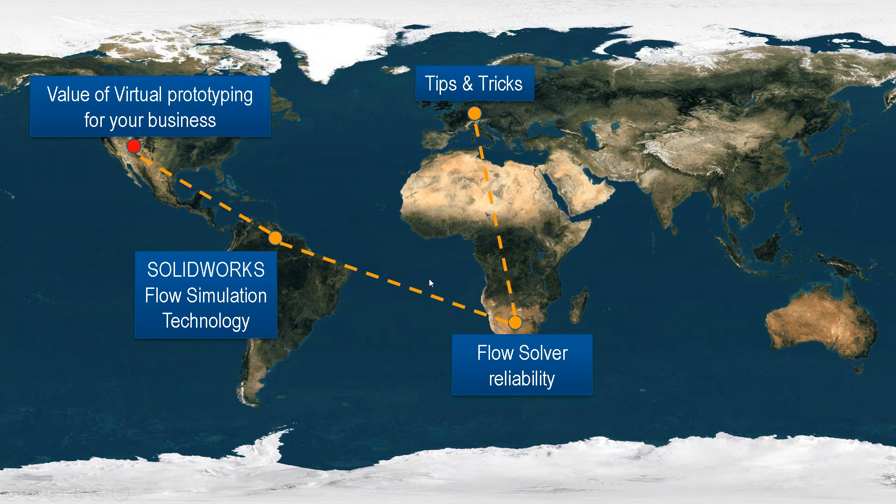So today we'll first give you some insight about the value of virtual prototyping with simulation. Then we will explain the key technologies in SOLIDWORKS Flow Simulation. Alessandro will show you some valuable documentation that proves the flow simulation solver's reliability. Then we will show you some tips and tricks on free surfaces, rotating region, and also how to manage transient results. Finally, I will explain how to submit ideas to guide the development of flow simulation.

Let's start from the value of virtual prototyping. This is the traditional approach, the traditional product development cycle. You start with a concept, then you engineer it, and finally you validate with some prototypes or with some simulations performed by an expert or maybe a consultant.

This approach is okay as long as you don't have issues. If you have an issue, you cannot change the concept, because you don't have time. You are in a phase where the design has to be delivered, so you need to modify what you have, and very often it's very expensive, and you don't have much freedom to edit your design as when you are in the concept phase.

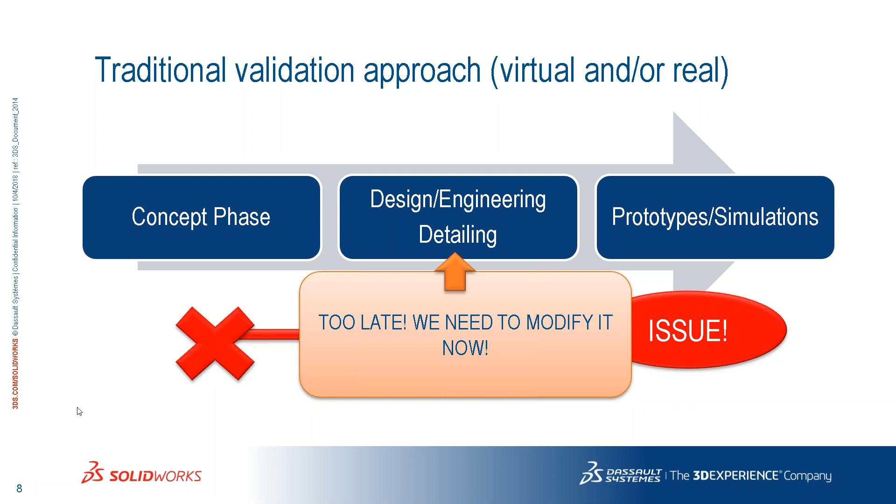So there are some limitations in this approach. It's obviously very problematic to edit an existing engineered design, and it takes time to edit the design. Also, creating prototypes or doing analysis at the end of the cycle is very complex because you're working on a model that has not been conceived for simulation.

Also, there are few resources because you don't find many consultants in the market or experts in finite element analysis. And you don't actually have the time to find an optimal solution, since you're editing something existing when the optimal would be editing the concept. Therefore there's no time to explore alternatives.

It's like going from point A to point B, where point B is your optimal design. You might lose your ideal path to the optimal design, like navigating with a paper chart. If you lose track, it takes a lot of time to get back on track. So not using simulation is like navigating with a paper map.

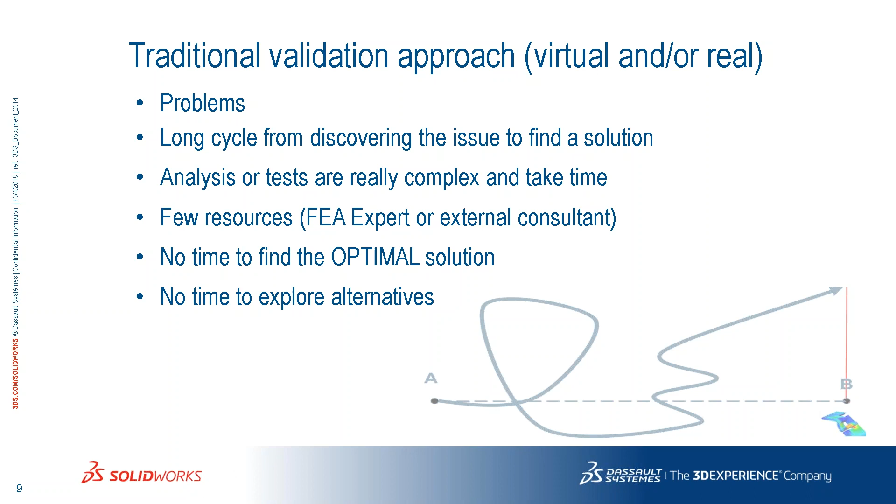This is the product design cycle guided by simulation. It means simulation is performed right after the concept phase, so if you find an issue, you can immediately fix it because you fix your concept. This is very easy because it's a simplified model. Simulations are very quick, and you can quickly validate your ideas. The system even has tools to automate ideas validation, like parametric studies that compare ideas and find the optimal design.

So the value of simulation-driven design is obviously time and cost, because you are compacting the development cycle. You improve quality because you are conceiving an idea that is optimal from the start. You don't have to cycle through many ideas. Also, it's much quicker to edit a concept than an engineered product, so you get your product to market quicker. And this way you are innovating because you have time to validate many ideas.

So it's like you're navigating from point A to point B with a GPS. If you lose track, the GPS will immediately put you back on the right track.

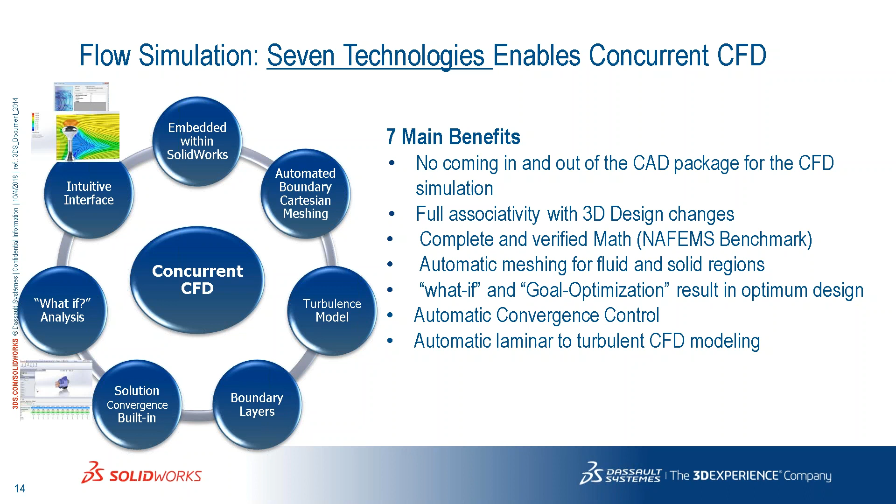There are some very powerful tools that allow you to do what-if studies and automatic optimization based on a design goal. The solver is very easy to manage because there is an automatic convergence control, so the calculation will stop automatically based on very simple criteria. Also, the model to model laminar and turbulent flow switch is automatic and very easy to set up.

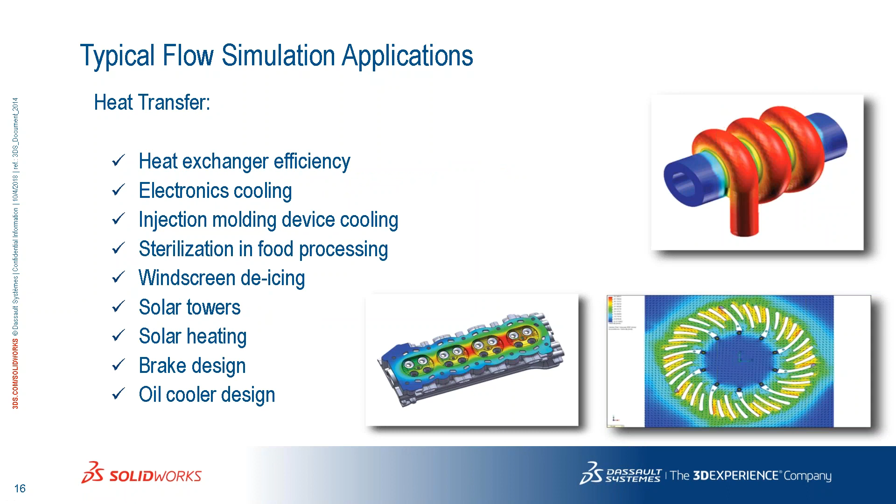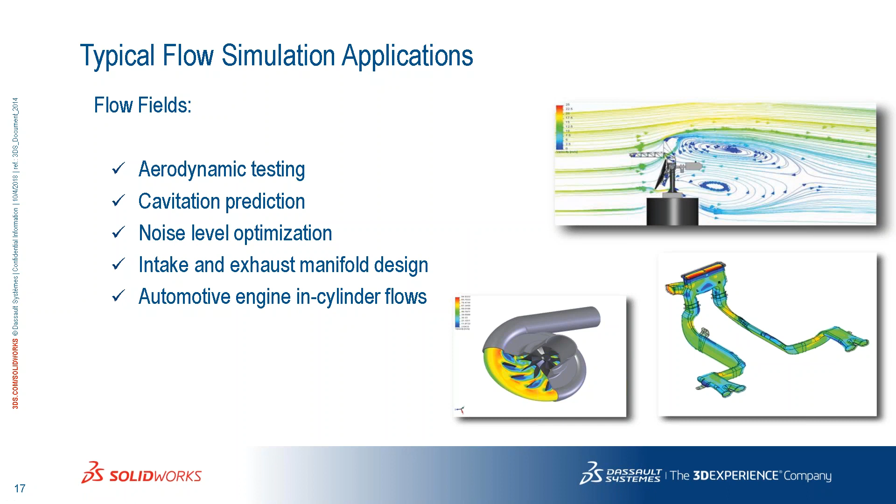Heat transfer is a very popular application, so you can calculate heat exchangers, solar heating, windscreen de-icing, really many applications. Also, you can calculate external flows like aerodynamic testing or even noise level.

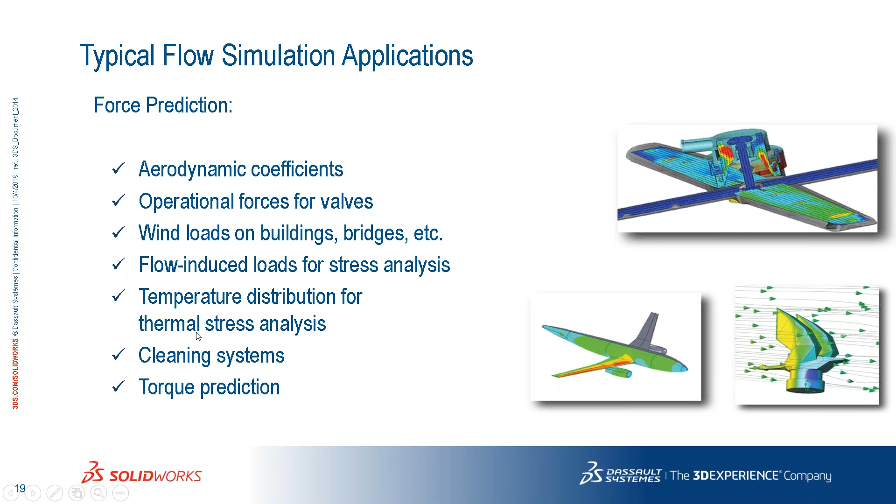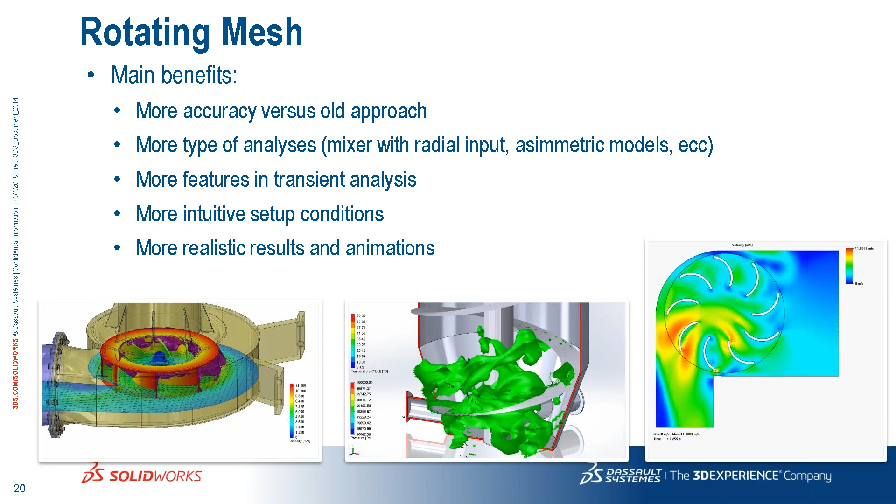Finally, Alessandro will show you shortly the application of the rotating mesh. It's a more accurate approach that will actually make the mesh move and do transient calculations, giving you more precise results. It will allow you to simulate models with non-axis symmetric flows, and also allow you to create a very realistic animation because you see the object moving at different time steps.

So the next step will be flow solver reliability. I will pass the screen to Alessandro.

Okay. Alessandro, can you see my screen?

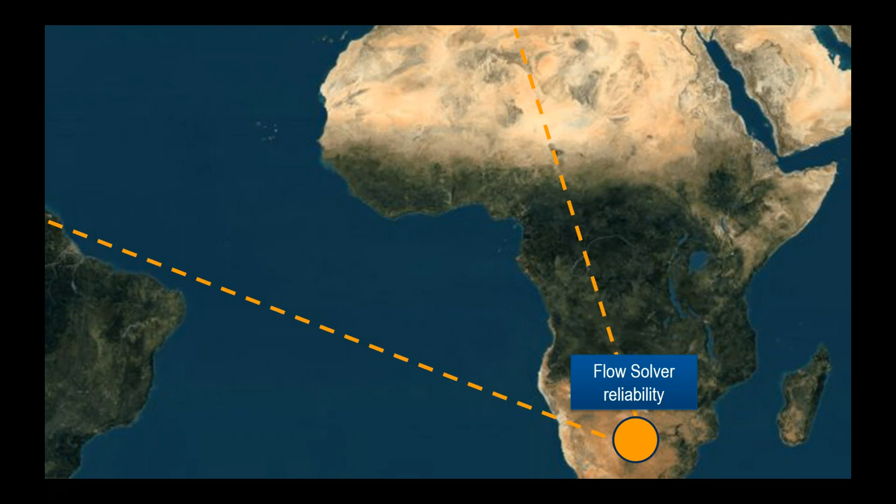Yes, okay perfect. So let's talk about the reliability in flow simulation. Basically, the concept is industry proven. I would like to share this with you because sometimes it's a little bit hidden in the installation. If you have flow simulation, you already have a lot of documents to prove that the real test data is really similar to what is calculated from flow simulation.

This is the path in your PC to find the documents. There are more than 28 examples with 2D and 3D models, so the models are available, along with comparison to the experimental data. Some examples include convergent divergent channel, heat sink convection, natural convection, porous media flow, impeller—of course we will see something about rotating region, cavitation, thermoelectric cooling, and so on. Many examples—I'd like to now show you the PDFs.

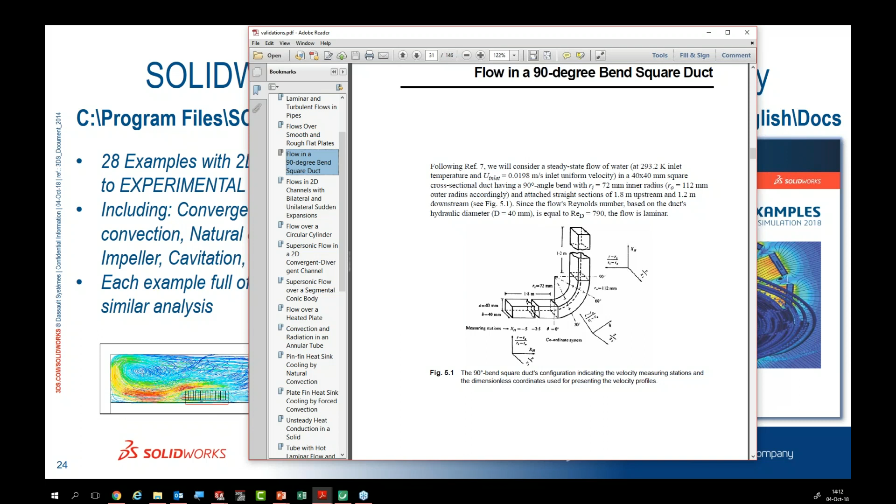So, for example, this is the validation example I am talking about. It's in your installation folder right now. Here you can see a 90-degree bend square duct with all the test data and all the flow simulation data for comparison, or you can see other examples as well, also in 2D.

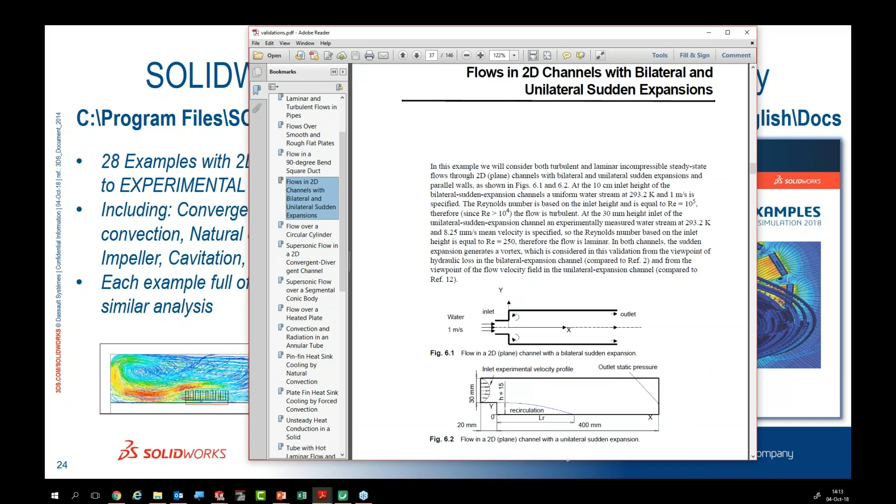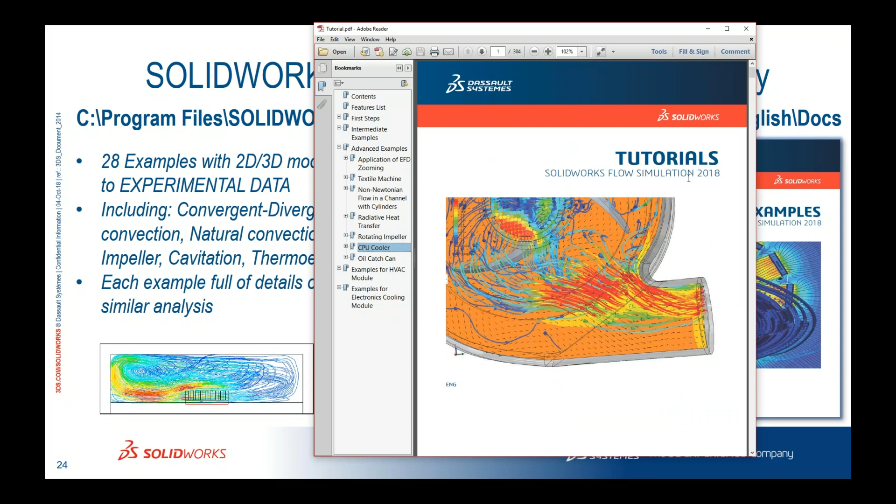So it's a very good start to understand not only that the solver is reliable, but also how to start with a specific case. Also present is the tutorial section, the tutorial document in flow simulation. For example, you can start with the first examples, very basic, some advanced examples like the CPU cooler that I will use also for presenting some tips and tricks. It's very useful because you have all the information on how to set up this particular analysis.

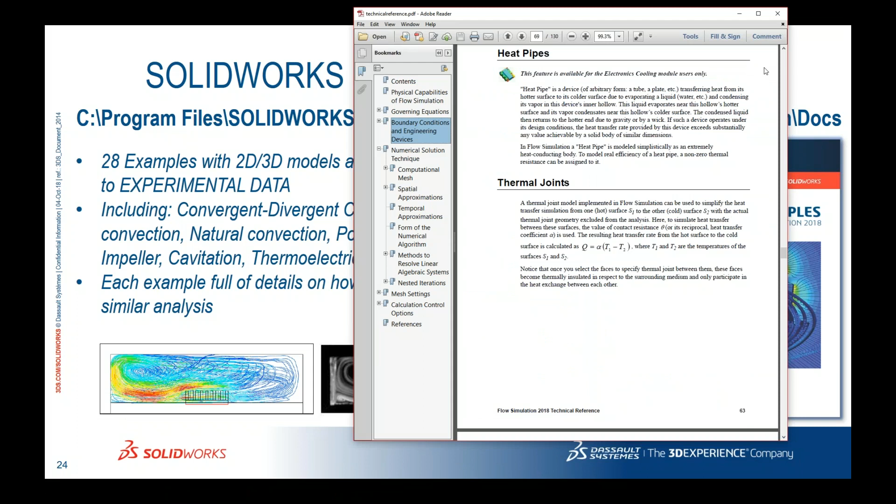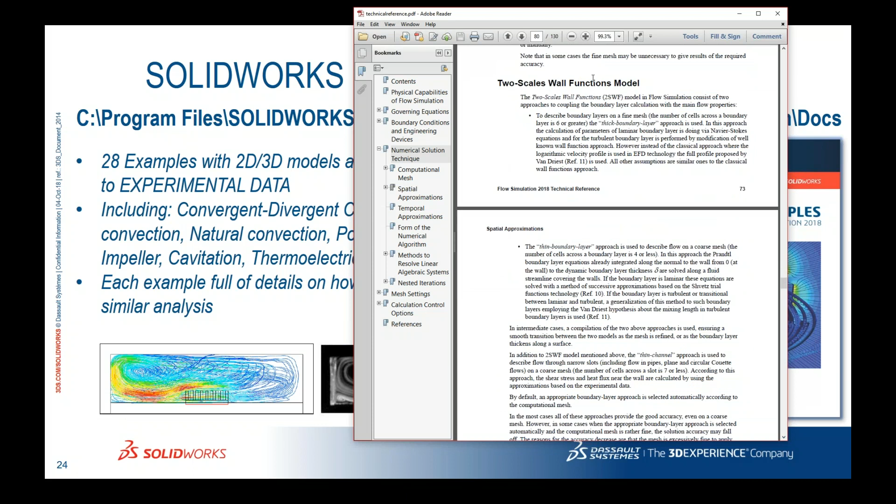Also, the last document I will show you is the technical reference. Apart from the nice image of the Star Trek Enterprise, this document is about the numerical approach—how the mesh is performed, how all the functions and approximations and equations are used, and so on. So if you really want to dig into this specific approach, this is the document.

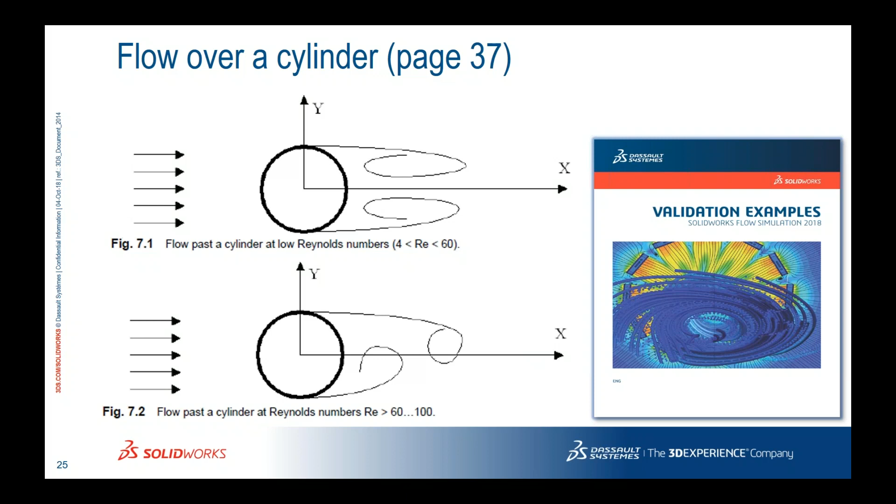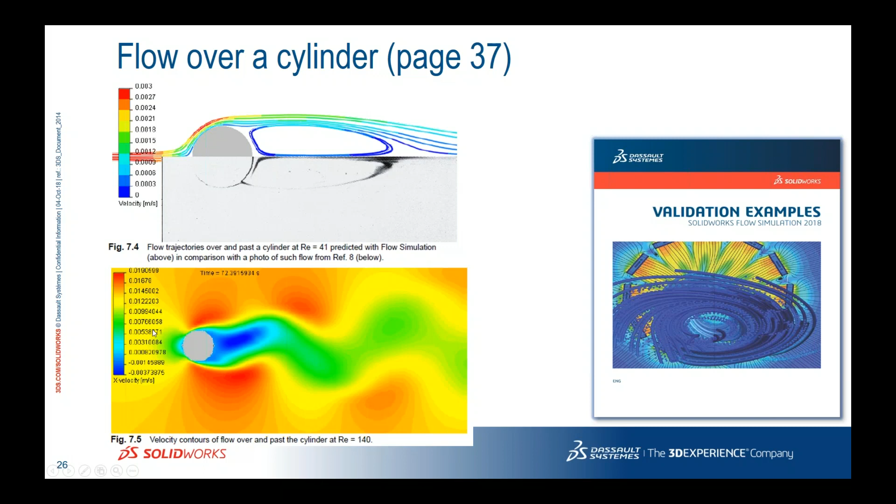Let's talk about an example. Here I have selected flow over a cylinder. You can see the flow with low Reynolds number and high Reynolds number, so laminar and turbulent. This is from the example—you can see the real results and the flow simulation results. Alessandro will show you an animation of the von Karman street in a few minutes. Also here you can see a comparison of flow simulation data with real tests—very useful tools to understand that the flow simulation solver is very reliable.

Okay, let's go to the main section about tips and tricks. We will show you a lot of things—sorry, we will rush a little bit, but the webinar is being recorded, so you can review the recording as much as you want.

So don't worry. Rotating region is very important—it's from around 2015, but I think it's worth understanding better how to use it. Also, free surface is new from last year, 2017, and maybe some customers have skipped this and don't know it exists, and it's very important. I'd like to share some examples, some tips and tricks. Optimization—Alessandro will talk about optimization strategies and other information, and something about post-processing, including animation of results, which is very important when presenting to your manager or customers.

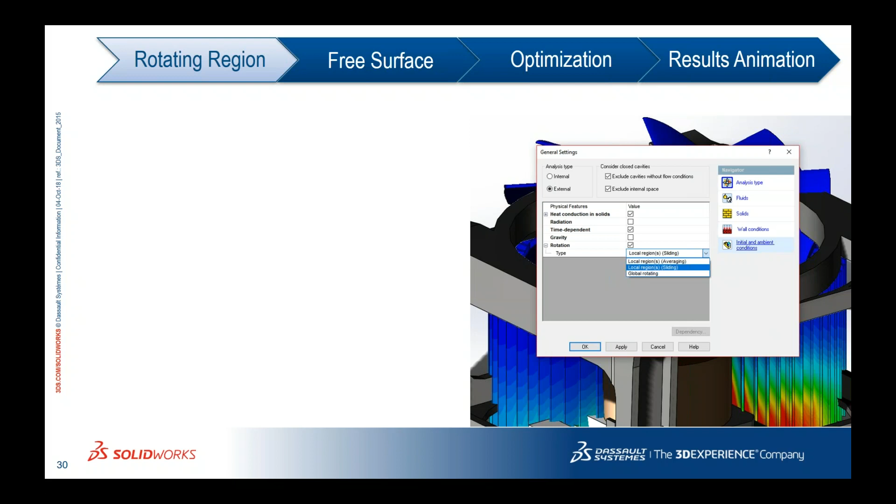When to use it: the sliding/rotating mesh technology is meant to analyze the real geometry of a rotating device. So if you want to design and analyze your geometry, it's better to use a sliding rotating region. You're also interested in the time progression of results. Of course you're interested in the steady state behavior too, but in this case it's important to understand how it progresses to steady state—you're analyzing the time frame.

When not to use sliding, and instead use averaging: when you just want to analyze the overall behavior and aren't interested in each time step before steady state—you just want to see the steady state. Or, for example, you're dealing with purchased components like fans, impellers, turbines, and so on, so you don't deal with the real geometry—you just want to understand the effect on the rest of the domain, and you're only interested in results at operating speed, at steady state.

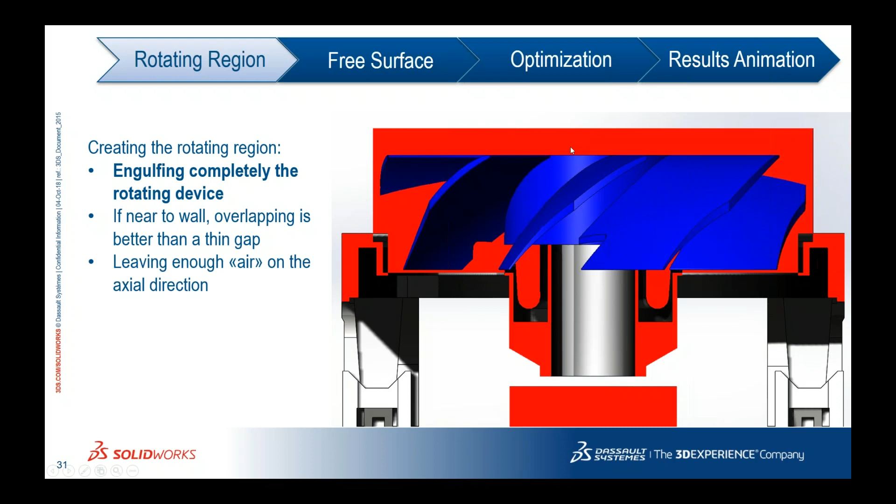Also, another suggestion is to leave enough room in the axial direction to give the solver enough information for the intake.

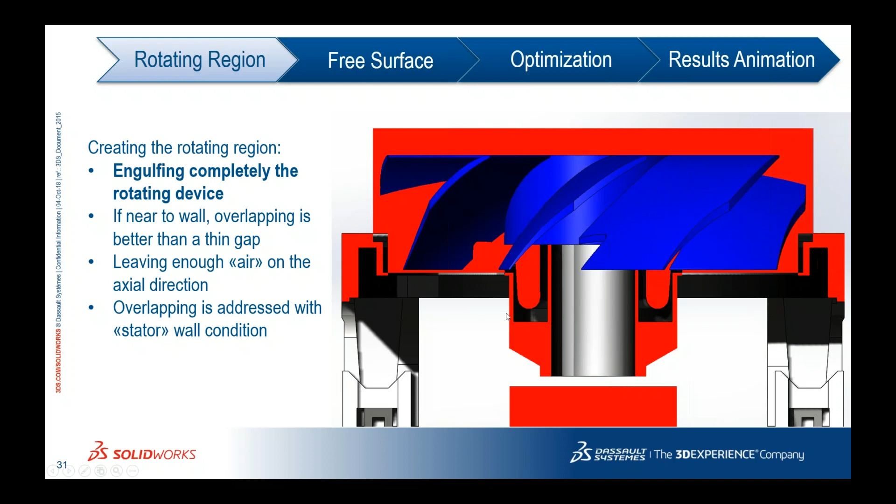If you're creating a rotating region like this, overlapping some components, you have to apply a boundary condition to the overlapping regions. You can select entirely the fixed components and add a boundary condition called real wall, then you have to activate the stator condition. This is much more preferable than leaving a small gap along that line—it's better to overlap the region.

Let's talk about the time step. Why time step? Because if you are using a rotating mesh, this implies automatically the time-dependent analysis. So you want to set up a time step, or let's say you have to use a time step, but you can set it up in a better way.

The first way is to leave it automatically, but don't get me wrong, the software is doing a good thing, but sometimes it's too much. Let's say it's calculating a lot of data. So the risk is to wait a lot of time just to have maybe a rough analysis.

So the suggestion here is to use a manual time step for better control. Better control, I don't mean precision. With the automatic time step, you have precision, but maybe you are wasting a lot of time. With the manual time step, you have a better control and a compromise between precision and time spent on the simulation.

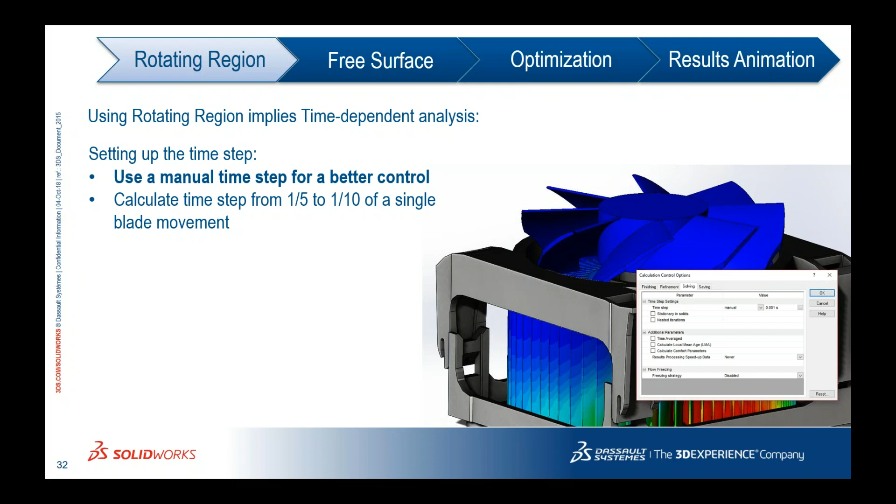I have here a rotating device with 500 RPMs, so it means 0.12 seconds per revolution. And I have 8 blades on this fan. So the time step here is 1/8 of 0.12 seconds per revolution times 1/10. This means 0.0015 seconds, or even less if you want in this case.

If you are in a situation that you want to spend less time, you need just a rough analysis, you can lengthen the time step, let's say up to 1/5 or even 1/3 if you want.

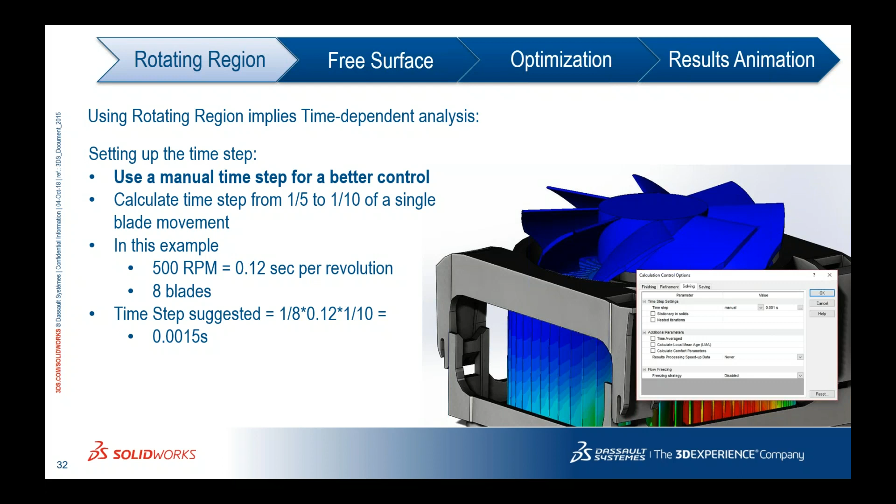Also, it's very important to remove travels and goals convergence and activate the physical time. What I mean, in the calculation control options here in Flow Simulation, you have to go to calculation control options. And here I have already shown you the time step has to be set to manual and input the time step. And in the first page, normally you will see like this.

It is not suggested with the time-dependent analysis, because basically travels means that the calculation is stopped when the results are traveling 4 times the domain. And that is not what you want. I will explain in a bit.

Also, goals convergence is not what you want to stop the analysis, because in this case, basically you want to stop the analysis only when you are at the end of the time frame that you have thought. So basically here, 1 second. So this is the suggestion for this kind of analysis.

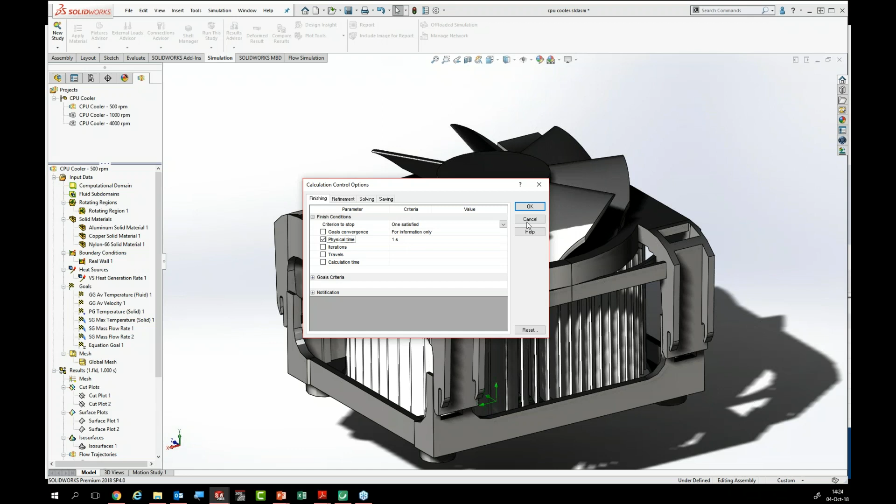Let's talk now about free surface. Free surface is new from 2018. Maybe many customers haven't used it, so I would like to give you a good idea to approach this feature that is very, very interesting.

This is the overview of the physical model. Basically, it's based on volume of fluid approach, and the main focus here is on robustness and performance. There are some limitations, of course, so it's better to know. For example, the two fluids have to be immiscible. We cannot mix together two fluids.

So we have here an example of pouring tea into a cup. Basically, we are talking about a liquid and a gas, or two liquids, for example. The density difference cannot be much more than 10 to the power of 4.

Mach number is limited. Of course, it's always transient because we are developing the flow, so we are interested in the transient analysis. And there are some limitations on the surface tension - we cannot take into account surface tension. We cannot use the rotating mesh with free surface. And we cannot have phase transition.

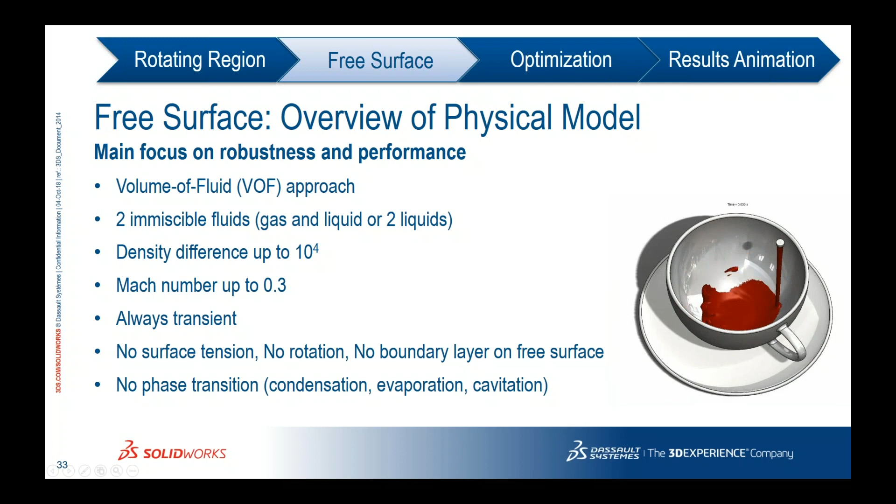Some interesting examples that we can analyze with free surface: we are talking about tank filling - very, very nice approach. We can input and understand how much time is needed to fill a tank. Also, the sloshing in a tank.

So we can apply forces, we can apply movement and inertia, and we can understand how much the water is sloshing, for example, in this case, and how much force it is producing on the tank. Also, we can approach fountains, so we can see what is the height of the fountain, we can see the spreading of the water, and so on.

Also, another nice application is about wave making resistance. So in a boat, in a ship, we can see the wave process, the wave, and also the resistance to that.

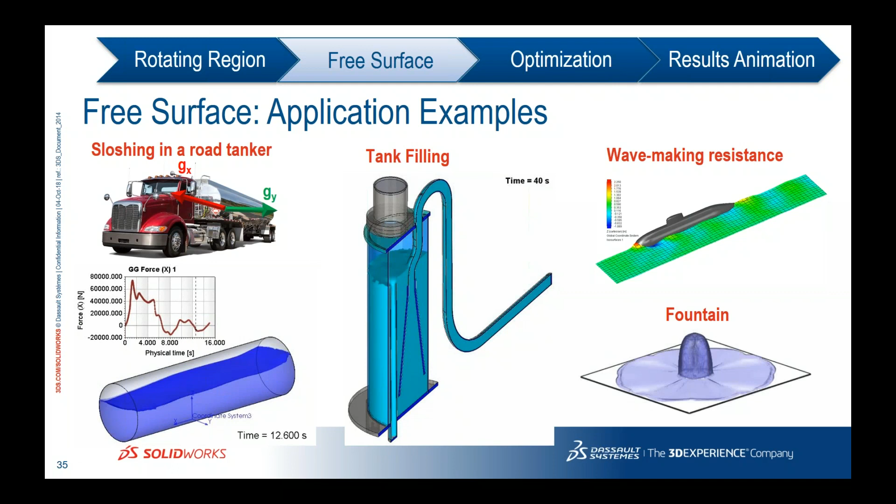How to use it? First of all, to use free surface, you have to activate the analysis type in the first window. This is automatically forcing the time dependent analysis, and automatically it makes unavailable some other choices like rotation, humidity, and so on.

Also, you can set up initial conditions. To do that, the best is to use the dependency type of H. This is available only if you use gravity. So in this case, you can set up, for example, a level of water, which is very nice because this is maybe the starting point of the simulation.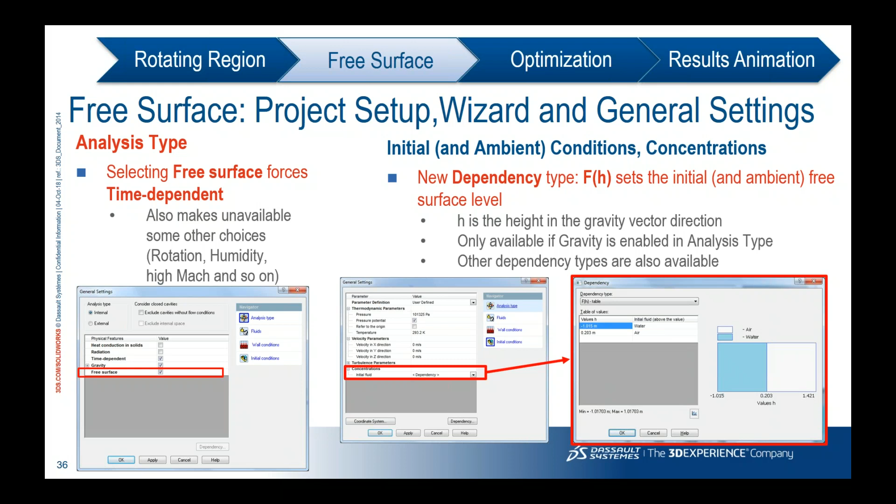Also, the same thing can be done inside the fluid subdomain. So if you want to use the free surface feature only in a portion of the domain, you can use the fluid subdomain here. You can define just a face of the subdomain. You have to input an immiscible mixture, so then you can add fluids like air and water together. And in substance concentration, you can again use the F of H table to define the initial level of the water and the air.

Also, a very nice feature is the ability to create a solid as an initial condition for the liquid. In the example on the left, you can model this solid, and then define initial condition and boundary condition. You can select the solid, you have to disable it, it's normal, and you can assign it as water, for example. Then the simulation will start with this as an initial condition, the initial level of the water in that case. Very powerful feature.

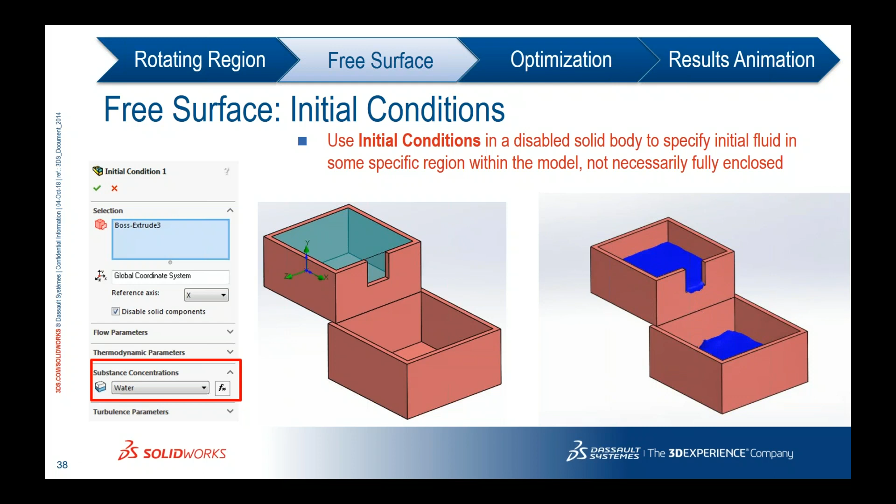Also, as I mentioned, we can analyze ship and vessel wave resistance and wake generation. Here are some tips and tricks. It's better to add the solid if the bottom is present, and not too much, because it has an effect on the wake generation. You have to make the domain sufficiently large. For example, with a submarine, you have to count the width from 5 to 10 times on the sides, and also up and down. And upstream and downstream you need at least one length of the object.

Also, the model is capable of simulating waves. You can input this, but at the moment there is no user interface, so you have to input the equation of a wave, and this can be used as an initial condition of rough water, for example.

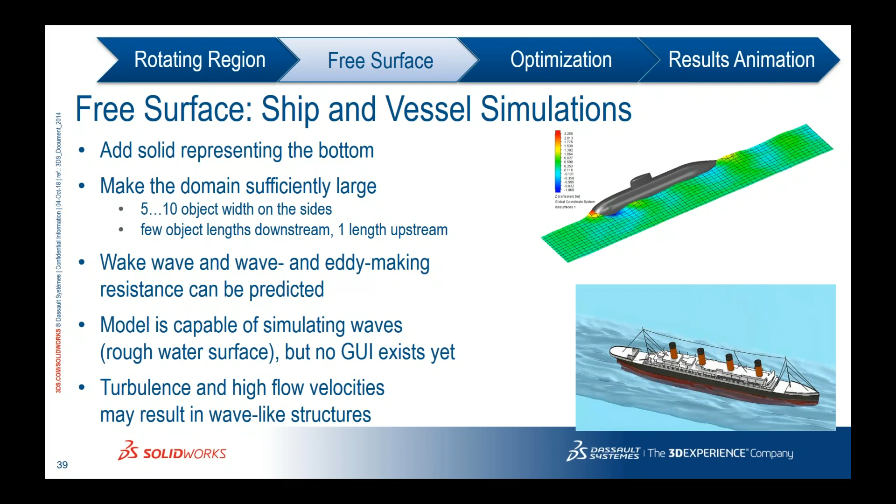Also, in the meshing of the free surface, you can use the solution adaptive refinement, the mesh adaptive. In this case, the mesh is recalculated each iteration in terms of the results that we want to see, so it will follow the flux, the stream of water that is pouring into the other recipient. It's completely automatic, but of course it's time consuming. So some tips: don't use it for chaotic flows, use it only for very well defined flows like here. Also, avoid using more than 1 or 2 levels of mesh refinement.

Okay, let's talk about results. Here is a very nice animation of a sloshing tank. In this case, the approach is based on the volume fraction. I will show you inside Flow Simulation.

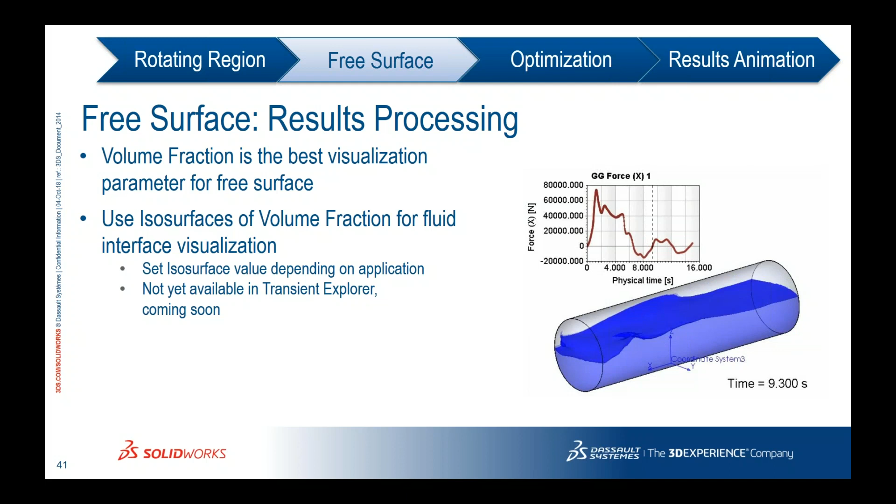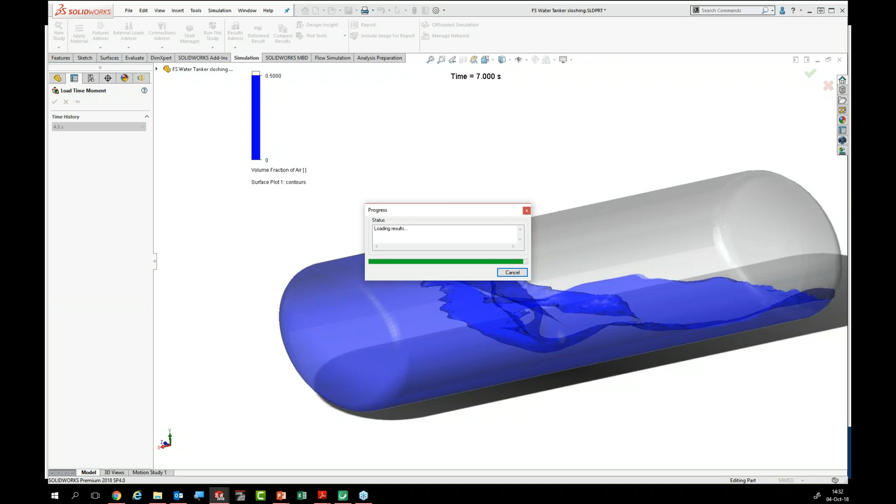So let me start from here. Let's check another time moment, for example. Okay, so you can see from this plot, it's like having the fluid that is sloshing into the tank. How is it done? Basically, I will start from scratch.

So you have the model. It's transparent, so it's just SOLIDWORKS. You have to select it as transparent. Then you have to create a surface plot of the inside surfaces.

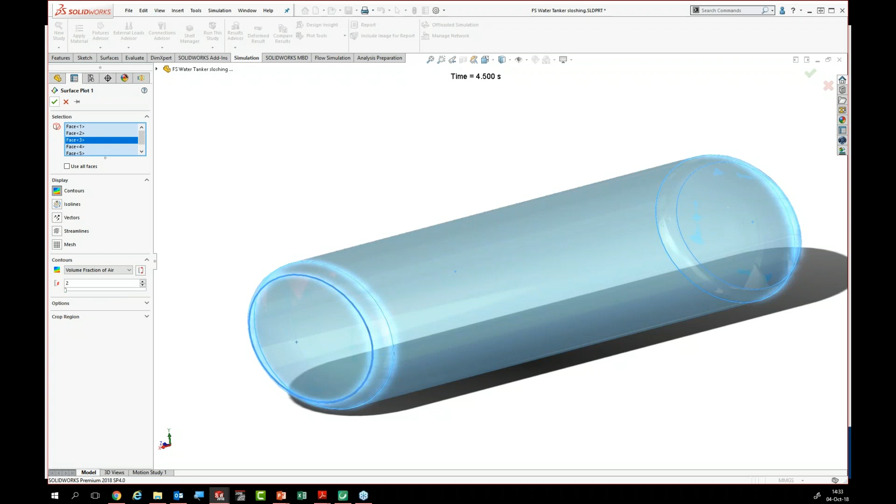Let's check the definition. You can see here I've selected the inside surface of this tank, and then I've selected volume fraction of air. You can also select volume fraction of another liquid or gas, depending on the simulation. In this case, air and water. You have to input just 2 levels of information, because in this case you would see only if there is water or not. From the legend, you can input the maximum as 0.5, so after this it will just not plot.

This is for surface, so you can see that it's missing something. The surface is only on the inside of the tank, and there is no closing surface of the liquid. To do that, we have to create an isosurface plot.

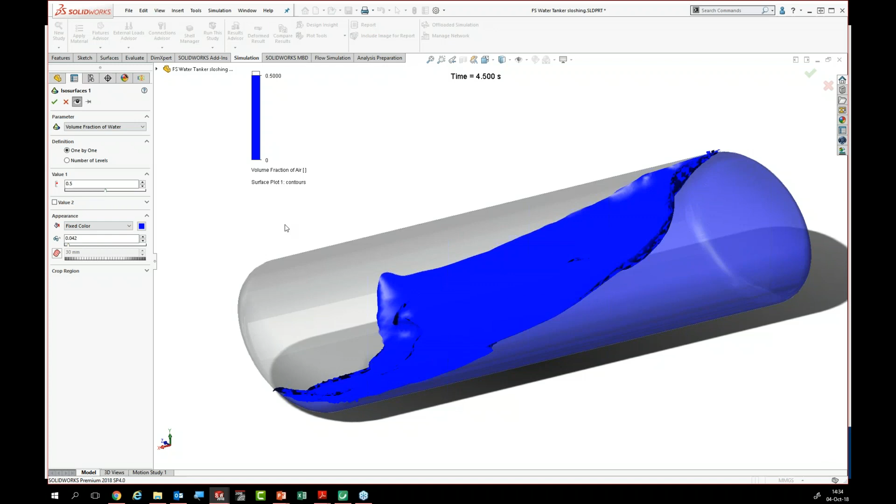So I will enter into the definition again of the volume fraction of water, and again the same value, 0.5 as before. Also here, I suggest you use a fixed color, like blue for example, and a little bit transparent. We can adapt it, and we can do it in this way. So like this, it seems okay, and now it seems to represent the volume of the liquid.

Also, in the Transient Explorer, we can see it better, and Alessandro later will explain more about the Transient Explorer. So in the Transient Explorer, I can see now—maybe it's slow through the connection, so I apologize for this—but of course you can review the recording later.

Also, I can use it manually, and it's a very nice plot of these sloshing liquids.

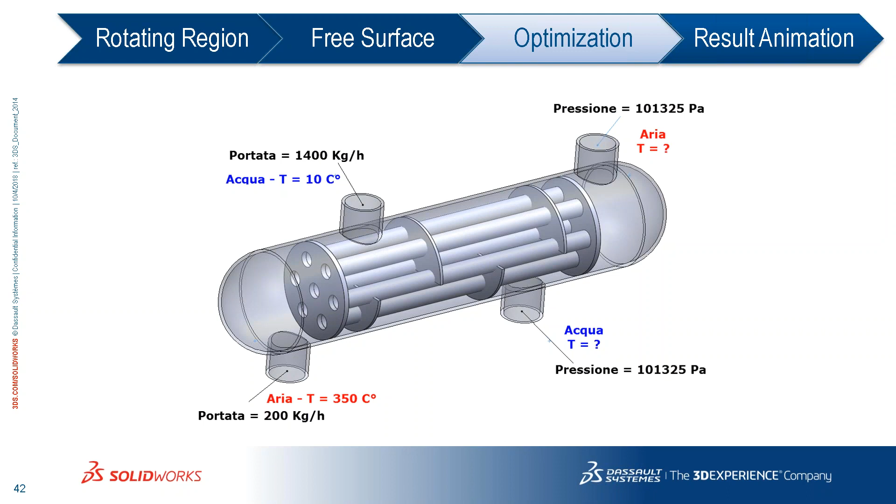I will show an interesting case. The aim is optimizing a heat exchanger. This is the input data: there's hot air at 350 Celsius with known flow rate, and some cold water also with known flow rate. At the outlet, the aim is finding the temperature of air and water to determine how efficient this heat exchanger was.

So I'm going to show you the model in SOLIDWORKS. Okay, so this is the heat exchanger. I can create a section view to show you the design.

I have created a flow simulation study. As you see, there are some boundary conditions: the inlet mass flow of hot air at 350 Celsius, inlet mass flow of cold water, and then environment pressure at the outlets. These are two fluids that are not coming in contact, so I had to define some fluid subdomains, one for air and the other for the water.

And then I put some goals on velocity and temperature, and also some equation goals to calculate the temperature reduction of air. So let me show now the results, I will quickly load them.

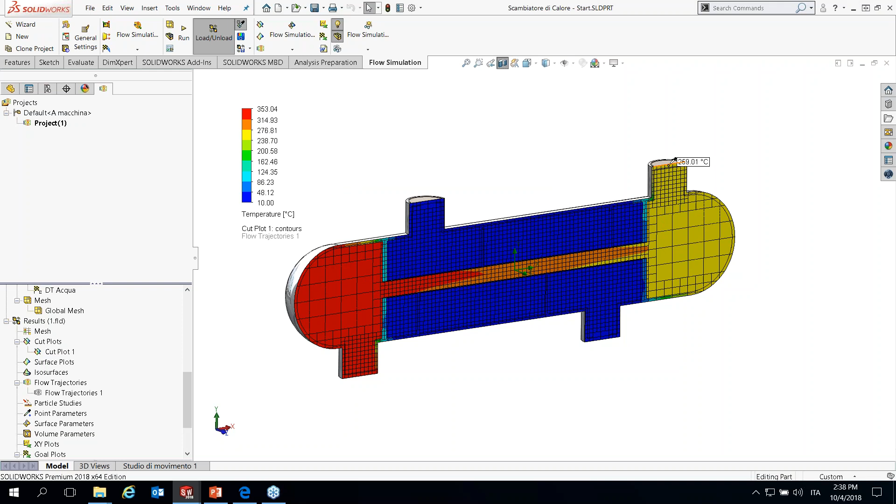I created a cut plot to better show you the temperature. I can find out the outlet temperature of air using the flow simulation tools like probing, so I can find that the hot air is now getting out at 269 degrees, or I can simply use some goal plot. Then I can generate some flow trajectories and animate them.

Okay, let's say that I'm not satisfied by this model and I want to explore some more design alternatives. The beauty of SOLIDWORKS Flow Simulation is that you can explore as many design alternatives as you want, even if you're not an expert of heat exchangers, exactly like me.

I'll show you the design ideas I had by using the 3D views. You can display these 3D views with any SOLIDWORKS standard license, and if you want to create them, you can use SOLIDWORKS MBD. This is a very effective way of presenting something to customers or colleagues in design reviews.

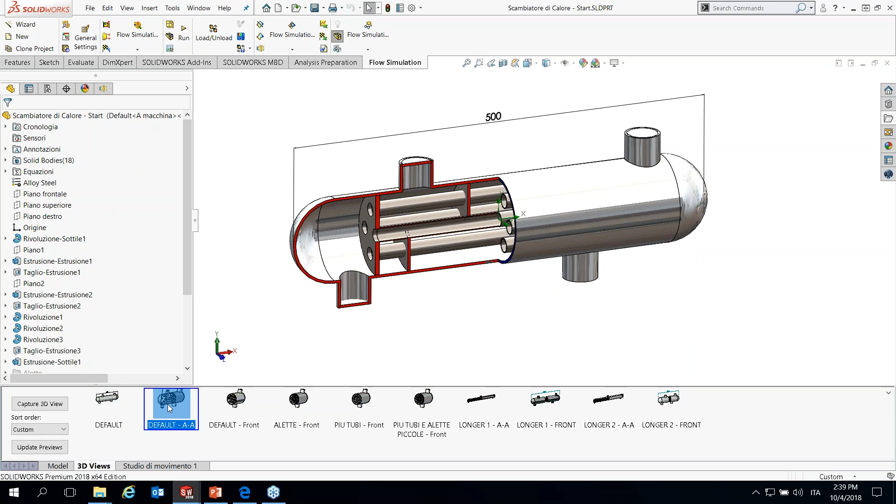So this is the basic model. As you can see, the length is 500 millimeters, and this is a section view that highlights the internal regions of the heat exchanger. The first idea I had to improve this design was modifying the pipes. This is the basic configuration with the pipes.

I created another configuration with some fins, big fins on the pipes. Another configuration with more pipes but no fins. And another configuration with the same number of pipes but smaller fins.

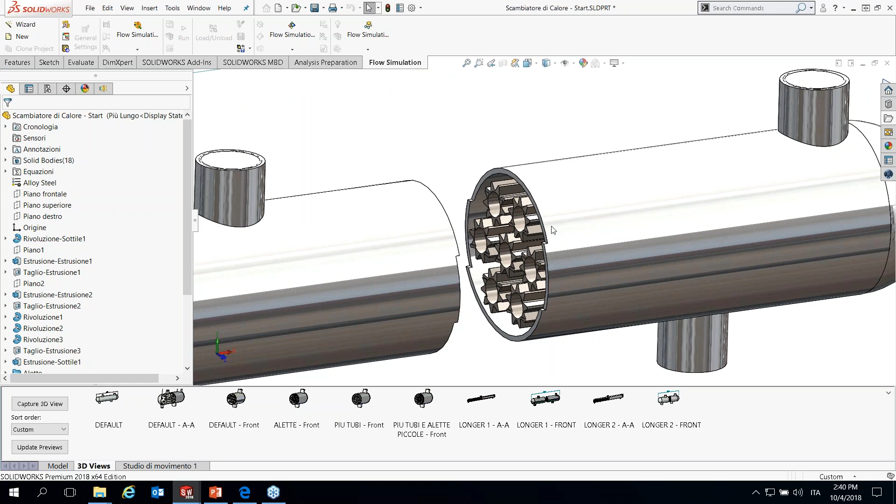And then the other designs are a much longer heat exchanger, 2050 millimeters, 2250 millimeters, and this is a section view. Actually it's a broken view in 3D that shows a low number of pipes with big fins. Then I created a slightly shorter version, only 2000 millimeters.

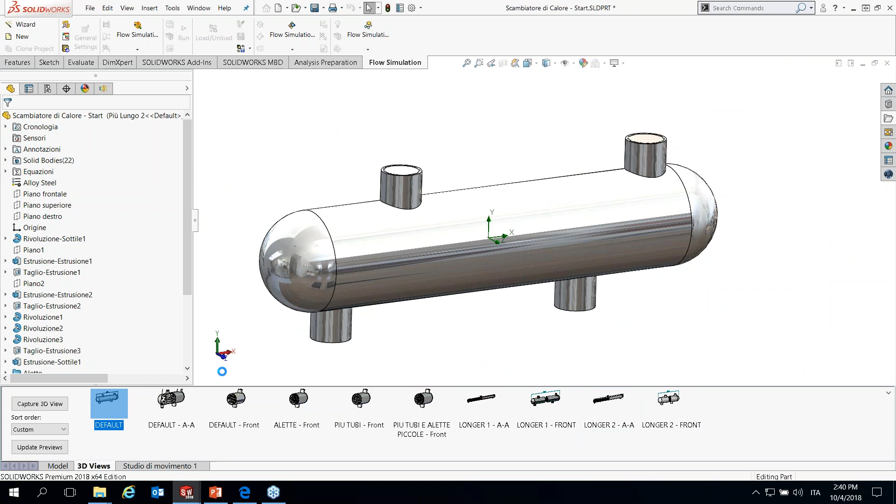And if we look at the inside with the broken view, we can see there are more pipes with smaller fins. So how do you analyze all these configurations in flow simulation quickly?

If you remember, I have already set up my flow simulation study for the default configuration, and here I have all the other configurations. What you can do in flow simulation is clone your study, and choose where you want to clone it. I want to clone it to the other configurations, and I also keep my results so I can make some comparisons.

So what flow simulation will do is copy the study and retain all the boundary conditions, the goals and the plots, so that when you're ready to go, you just need to run all your studies. As you can see, in a few seconds I'm preparing some very complex setups, but it would have taken me at least 5 minutes for each study. Now I have more studies, one for each configuration, and I can even run them all without needing to run one by one.

I can use a tool that is called batch run. It means that from this screen, I can decide which studies I want to run, and I can also decide if I want to just mesh the study, if I want to solve it, if I want to use all the cores for that particular study or only a few cores.

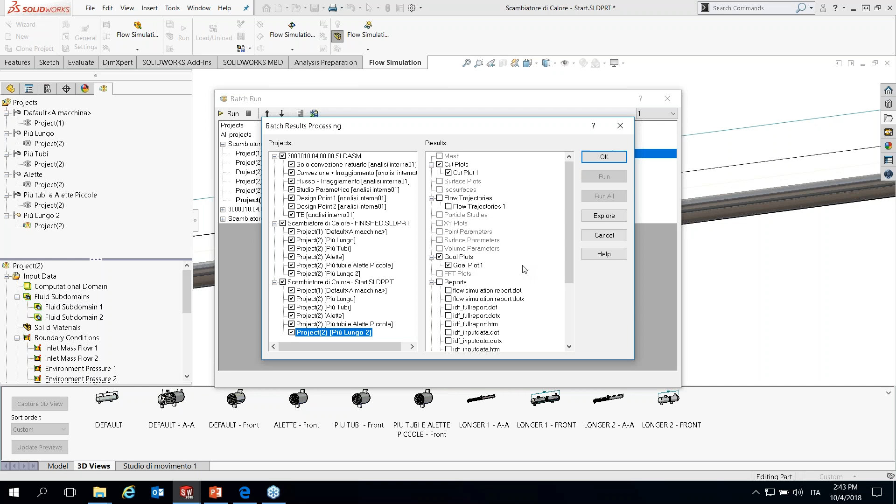Also, as long as you're here, you can also prepare batch result processing. It means that for each study, I can decide the output that has to be saved in the study folder. So the flow simulation can save a picture of the cut plot for each study, also the goal plot, the Excel file, and if I want it can generate the report automatically. So this way, I have a quick tool that allows me to compare many design alternatives.

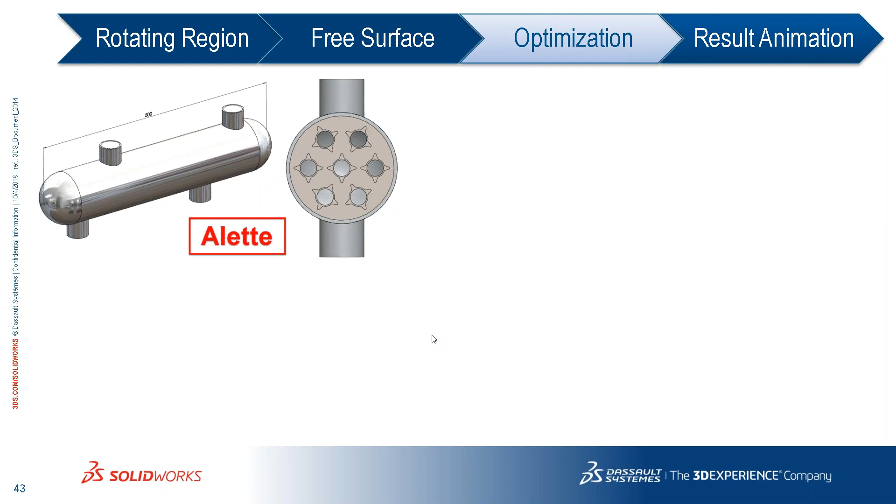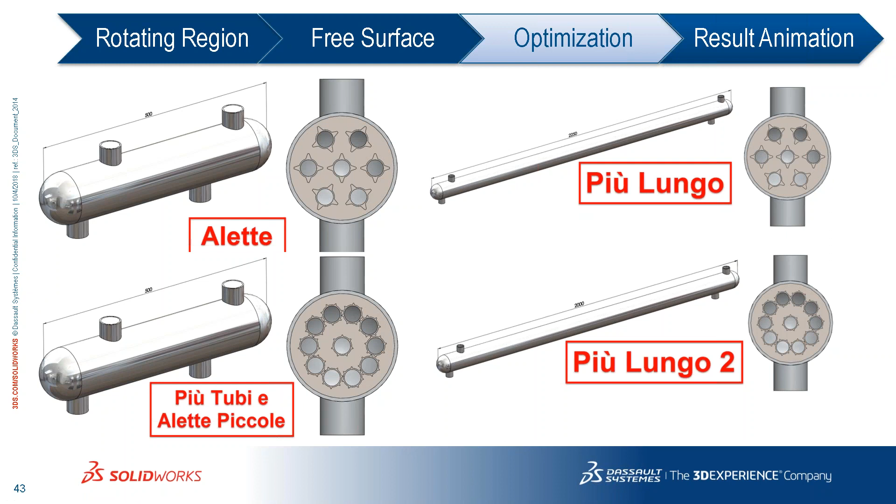Okay, I'll show you the designs. As you can see, I think the 3D views have been very clear. This is the short version with some fins, the long version with the same number of pipes and the fin geometry, the short version with more pipes and smaller fins, and the slightly shorter version with more pipes and small fins. I'll show you now the results of this heat exchanger.

So let me close this one and show you the other design with already calculated results. When you're here, you can use a tool called compare results. You can launch it from the results, and it will allow you to select your studies and also what result you're going to compare.

So from this window, you need to select the studies, and then you need to select the results. Inside of the software, you'll see the results. This is the summary of the results. What I'm very interested in is this row, which is the air temperature. It's showing me the final temperature decrease of air for each of the studies.

If you want, you can get some visual hints like highlighting the min and max value. I'm obviously interested in the max values. So in this case, I'm having the max on the longer version of my heat exchanger. You can also display them in graphical format, which is more intuitive.

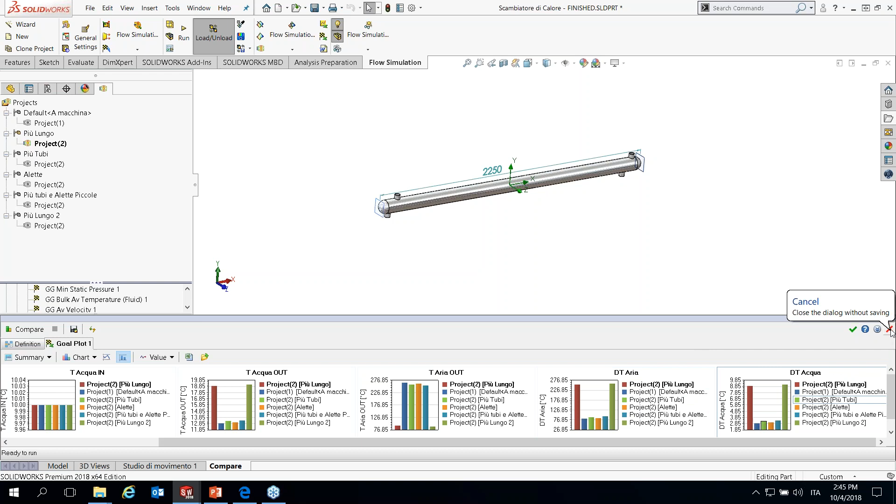So I'm going to look at the last plot on the right. From the bars, you can see the red one and the green one are the longer version of the heat exchanger that provide the biggest temperature reduction to air. And you can, of course, export all of this to Excel to elaborate the data better.

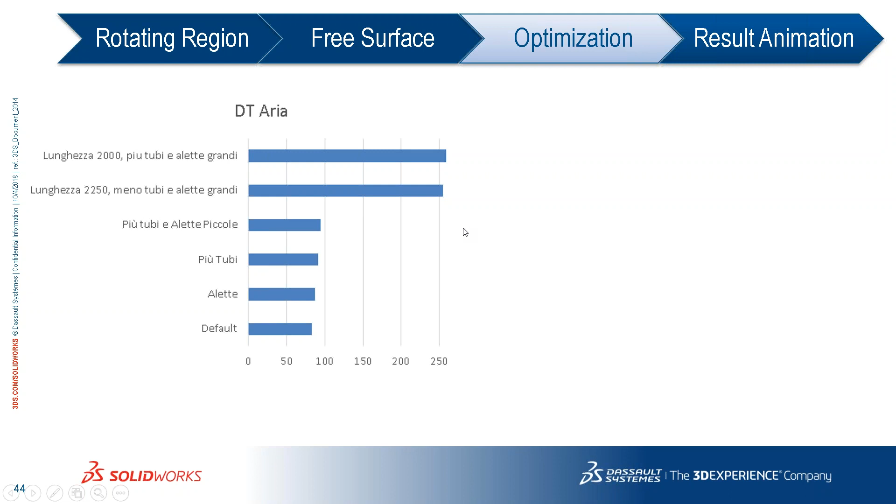I'll show you the plots that I will get from Excel. So this is the temperature decrease of air. Obviously, the biggest decrease is provided by the longest heat exchanger. More or less, the results are very, very similar between the 2000 millimeters and the 2250 millimeters heat exchanger.

What I've shown you is not automatic, even if you've seen that it's very, very quick to set up something like this. It took me really a few times to create all these comparisons. You have some tools that can even automate further your research of the best design.

We have a tool called parametric study that will allow you to set up some parameters, some dimensions of your model that can vary, and you can launch many studies in batch and see how your result, like temperature, is varying as the parameter dimension is varying. So when you change the geometry, how it's affecting your final result.

And you get also goal optimization. In this case, you put a constraint, so you decide what dimensions you can vary. Then you put a goal, like maybe a max temperature decrease, and based on this, the software will figure out what is the best design that will respect your goal. So it will do all the job for you, and you can optimize the design by varying more than one parameter. So I could vary the length, the number of fins, the number of pipes, the thickness of the pipe. You have the freedom to find the best design.

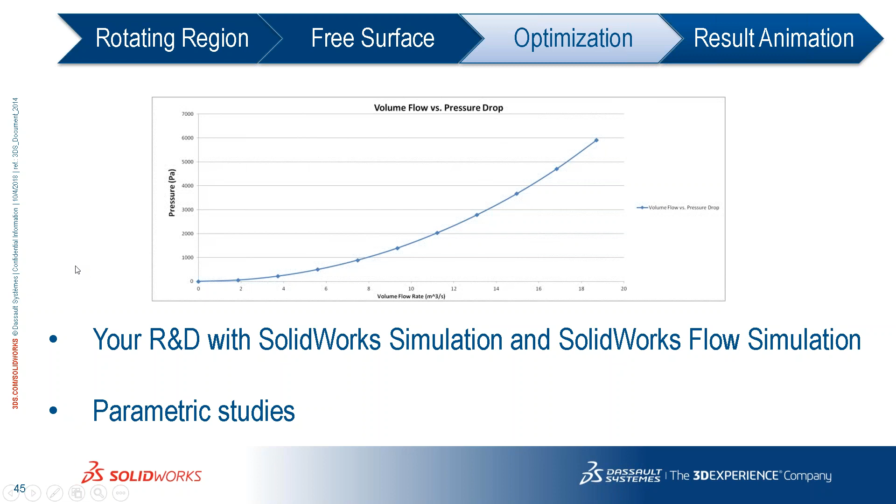Okay, next will be how to manage transient results. You have two options. The first is the Transient Explorer that Alessandro showed you a few minutes ago. This is used when you don't need to save a movie, you just need to explore your results at each time step. If you want to create an animation, you need to save the full results.

In this case, you can animate surface plots, cut plots, flow trajectories, ISO surface plots to see the behavior of the system when time varies. I think Alessandro would like to show you an animation of the rotating region with this approach.

So I will pass in the screen. Okay, let's share back my screen. Let me know when I'm back. That's right. Can you see my screen, Alessandro? Yes, we can see it.

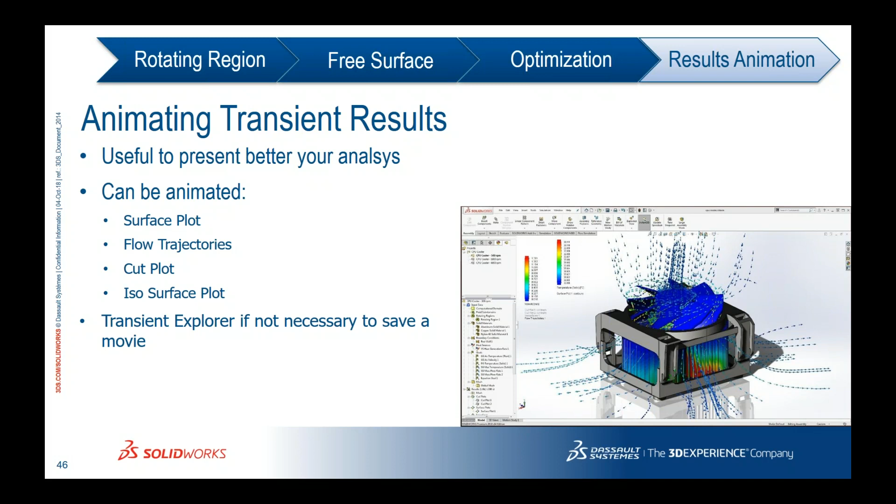Okay, perfect. So let's say we have the transient results. Now we want to present the results better, maybe to my manager, to the customer, and so on. So I would like to have something like this animation of the flow trajectories, or an animation of the blades, or together, and so on.

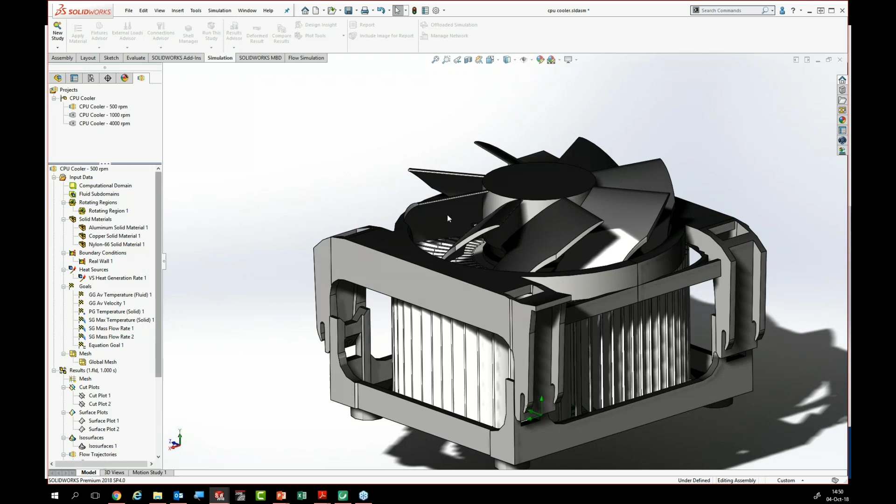So let me switch to SOLIDWORKS. Now we came back to the fan analysis, to the CPU cooler analysis. We have the results and we want to animate them. First of all, I have to hide what we are trying to animate from Flow. So in this case, I will hide this one. And then I have to create a surface plot here.

On the surface, we can just select the component that we want. We don't need to select all the surfaces one by one, and we can, for example, plot the temperature. So in this case, I can see the surface plot like this one. This is very simple - we can see the temperature, or just a color, or whatever you want. It's configurable, as you saw before.

Now we want an animation of the blades, for example. So you have to insert the animation - very simple - and then click the wizard. In the wizard, we can delete all the existing tracks. We don't need to rotate the model, and we have to use the scenario option. The scenario option will tell the software to input all the information from the time step, and of course you can use a uniform distribution or a proportional one.

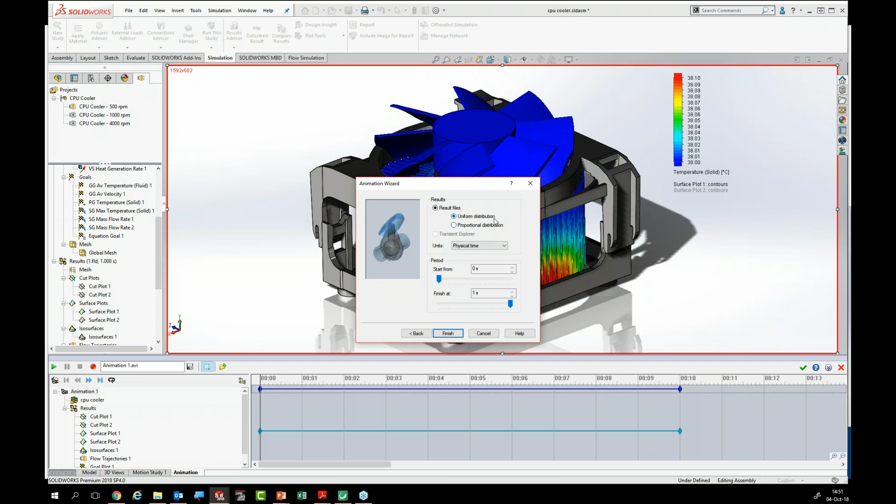Why is that? Because if you're using an automatic time step, you need to reset it up - you may end with a different span of time steps. But if you approach it as we suggested, with the manual time step, you will have a uniform distribution. The units is physical time from 0 to 1, and let's finish it.

Now I want to use, for example, this surface plot. In this animation pane, you have to go to the surface plot, right-click, insert control point, and slide to the final point here. So now let me try to animate the results.

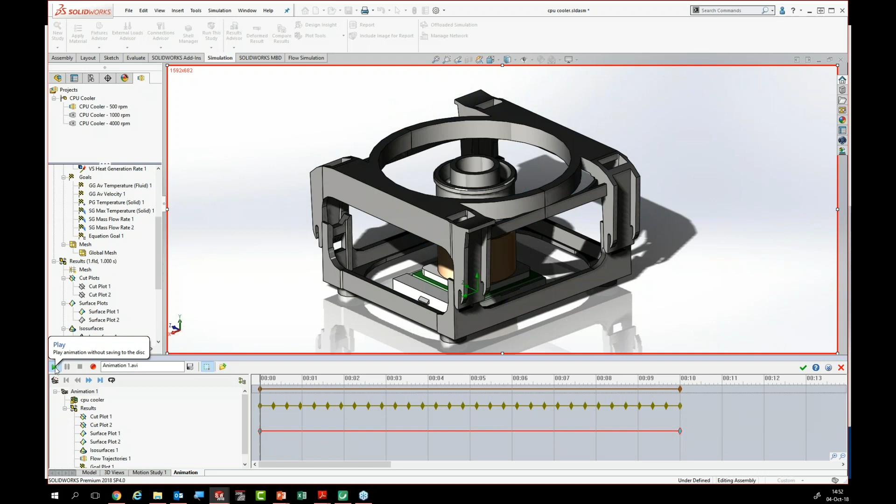Maybe it will not be so fluid from the other end, but you have seen the PowerPoint, or you will see the recording itself. From here, you can just review the animation, and then save it in AVI format or whatever you like. So very simple plots, very simple steps, and you will have something like this.

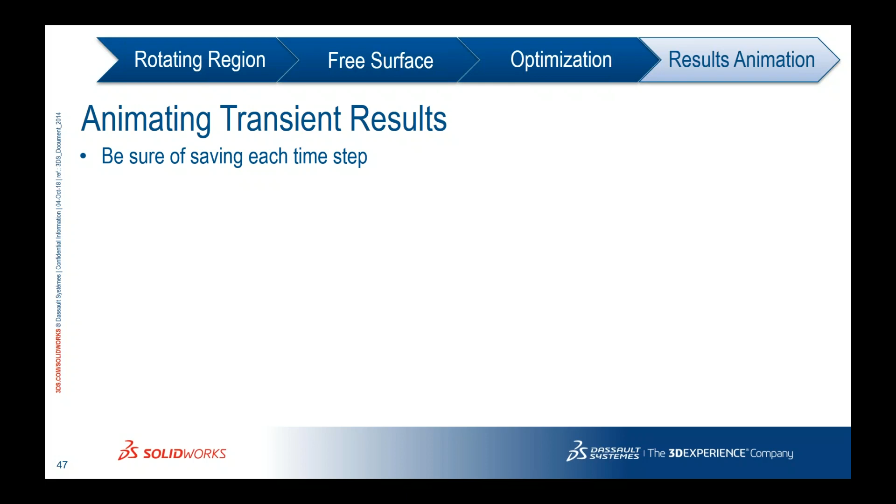So to summarize the steps: be sure of saving each time step. This is done in the calculation control options, saving settings, when you have activated the transient analysis. Remember to activate full results saving for each period that you want - maybe not every iteration, or maybe for each iteration.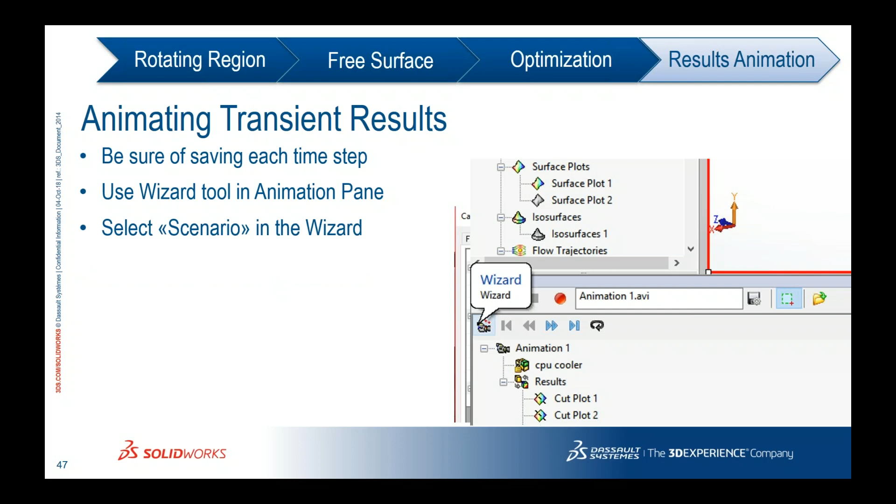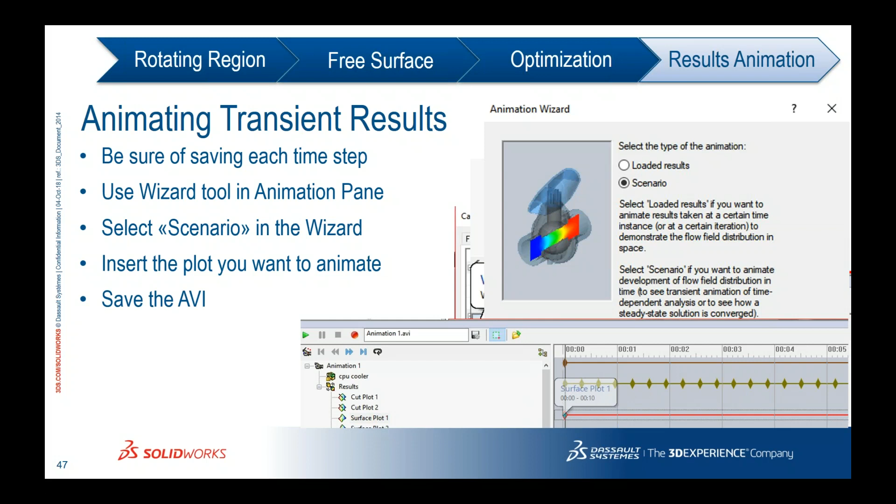Another step is to use the wizard tool in the animation pane - you have seen it in action. Then you have to select scenario in the wizard, and insert the plot or plots that you want to animate. You can have multiple plots that you animate together. You have to try it for yourself - it's very nice to see what it's like to do. And then you can save the movie. At this point, I will pass the slides back to Alessandro for the remaining.

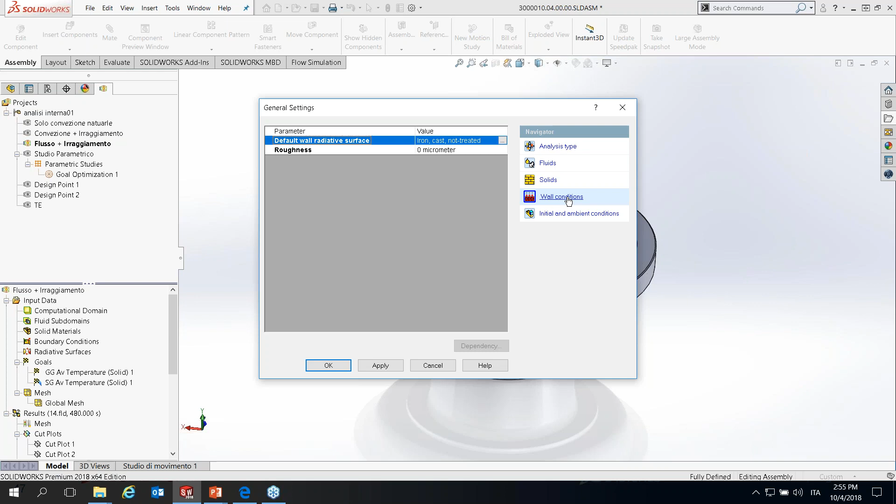For what concerns fluid, I will choose air. I will choose the solid material of the part, which is iron. In the wall conditions, you have to define the emissivity of the iron surfaces. In the engineering library, there's already iron as a material for emissivity, so you don't have to figure out the value, it's already in the library.

Finally, in the initial conditions, you define first the temperature of the solid, which is 1000 Celsius. Then you define the temperature of air, in this case 30 degrees, and also the velocity of air that is blowing on this part. In this case, the air is blowing in the Y direction, from below, following the direction of the blue arrow you see on the 3D model.

Said that, you don't need to add anything else than maybe some goals. I put some goals to monitor the temperature of solid, and you could also add some goals to monitor velocity.

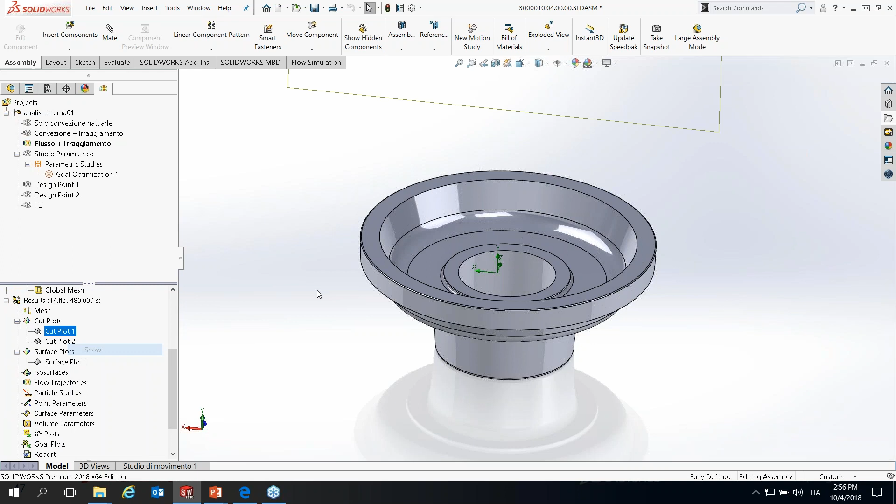I'll show you quickly the results. This is the result of the temperature of air, and you can also add a surface plot showing the temperature of your 3D part. I would suggest putting the scale in a way that emphasizes the temperature change in the solid when creating the animation. So I would put in the solid 1000 degrees as maximum, and 356, which is the lowest temperature the solid will reach at the end of the analysis.

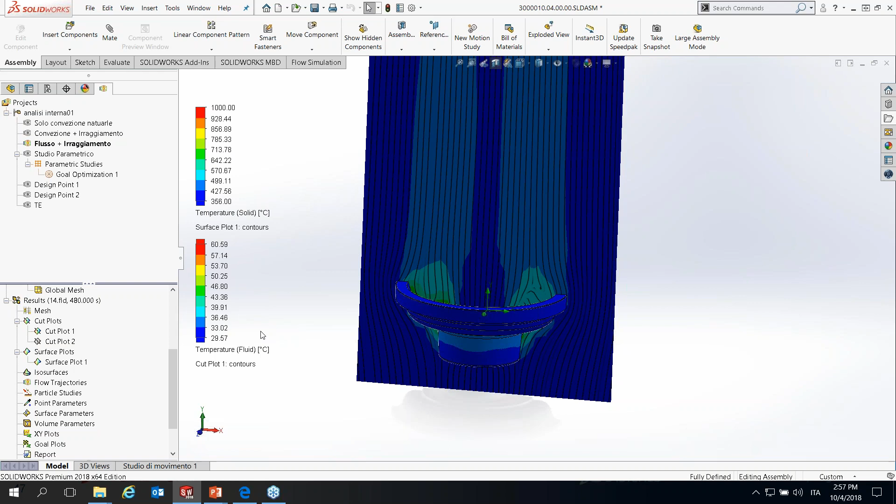And the same for the fluid, you would put some temperatures. So I already have the animation. Maybe I will turn the model around so you can see it better. I will play it. Basically, you follow the same actions that Alessandro showed.

You create a scenario, and then you add both the cut plot and the surface plot, and as the animation plays, you will see the solid turning from red to blue, and also the air near the solid will become hot, and convection will make it go towards the roof of the building where this model is supposed to be.

Okay, let's move on.

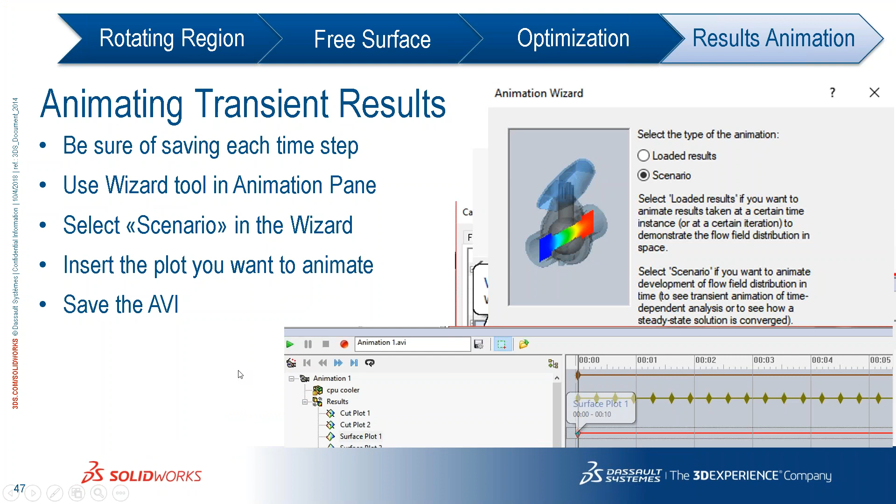Another tool you can use is the Transient Explorer. If you want to create a transient animation, you have to calculate full results for each time step, and this consumes a lot of disk space and also takes time. If you use the Transient Explorer, you can simply calculate the results you are interested in, saving time in calculating and in saving this, and also saving some disk space.

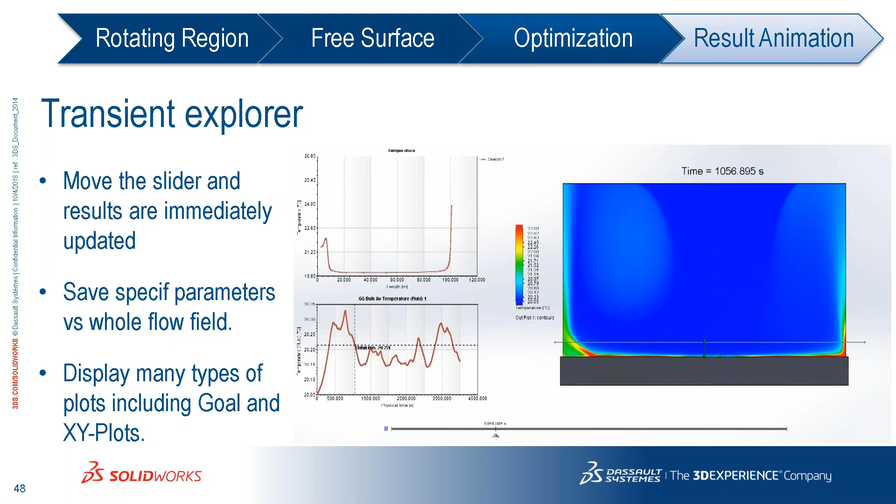So basically, with Transient Explorer, you can move a slider, and it will show you how the results are changing at each time step, and you can apply it to cut plots, surface plots, and also XY plots. So how does it work?

I will maybe show you again the Transient Explorer. Basically, you have to define at which iteration you want to save, and also the parameter that you want to save with the Transient Explorer.

Okay, so next is the SOLIDWORKS Flow Simulation ideas, how we manage them, and how you can submit them. Basically, the software is growing, and each year we'll receive more than 6,000 enhancement requests. It's very difficult to guess which are the most important to you.

Usually at the end of the year, in late October or start of November, we give you the ability to submit your ideas on a portal called Top 10 List. There is a first phase in which you can create ideas and propose as many as you want.

The top 10 ideas are presented at SOLIDWORKS World, either on stage or lately in a dedicated session with our R&D manager and also our CEO Gianpaolo Bassi, so that customers can discuss those ideas in more detail and maybe be involved in some product R&D project.

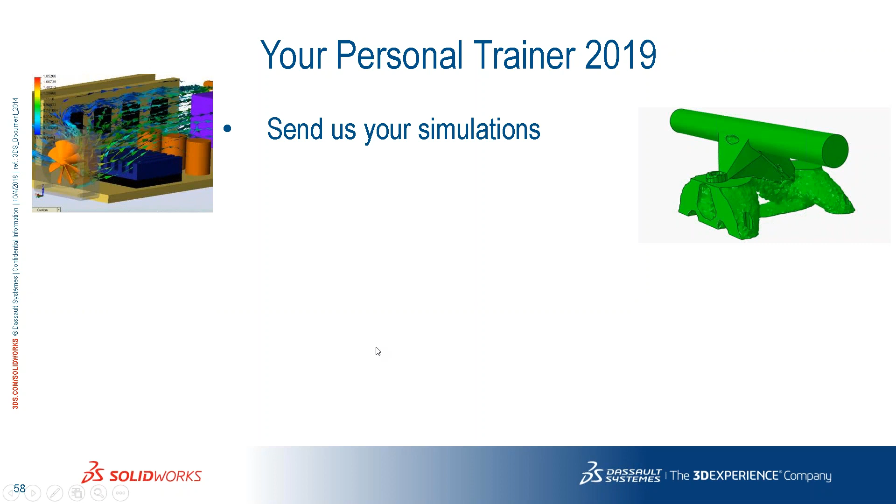The idea is very simple: to give you something and to take something. We would like to reframe the Your Personal Trainer series more towards your simulation problems, your issues, your models. We'd like to see your simulation, and you can get advice from us to improve productivity, to improve results, or to assess some issues if you want.

Of course, we are not the technical support, but we will show the most interesting cases in this kind of webinar series.

Of course, there are some caveats. We are addressing only current simulation portfolio customers under subscription. It's not meant to be a consulting activity. We'd like to give you advice, just advice, not engineering consulting activity.

Of course, there will be a selection process, and if you want us to show your models, you will need to sign a waiver. That's normal. Also, we would like to have you as a guest, if you want, on our webinars to present your case and see with us how to better address your model.